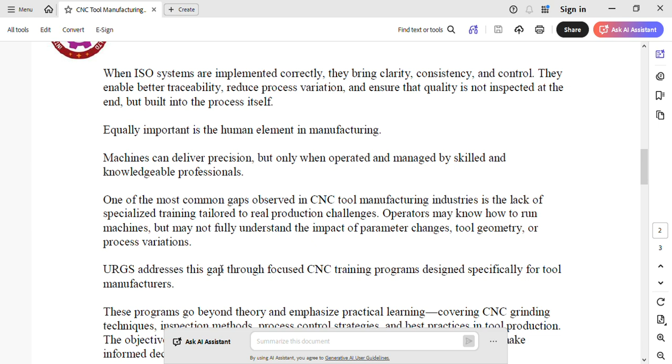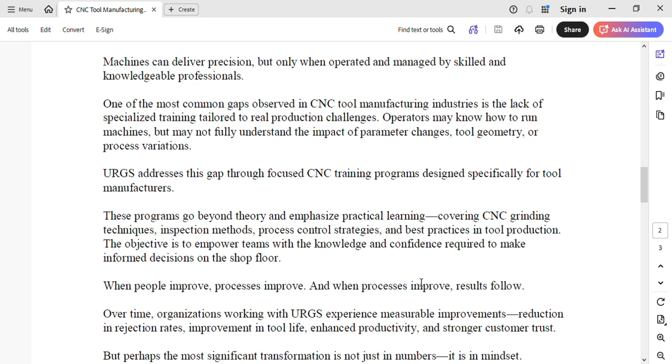URGS addresses this gap through focused CNC training programs designed specifically for tool manufacturers. These programs go beyond theory and emphasize practical learning, covering CNC grinding techniques, inspection methods, process control strategies, and best practices in tool production. The objective is to empower teams with the knowledge and confidence required to make informed decisions on the shop floor.

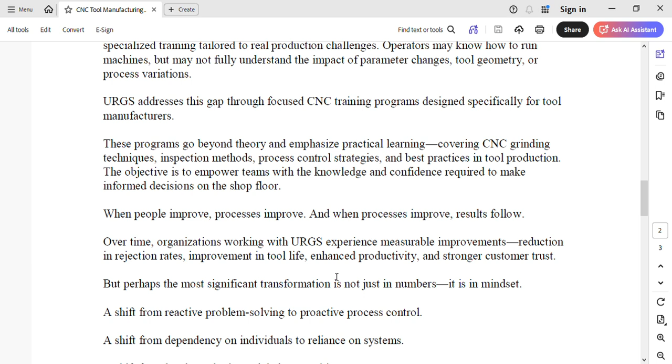When people improve, process improves. When process improves, results follow. Over time, organizations working with URGS International experience measurable improvements: reduction in rejection rates, improvements in tool life, enhanced productivity, and stronger customer trust. But perhaps the most significant transformation is not just in numbers, it is in mindset.

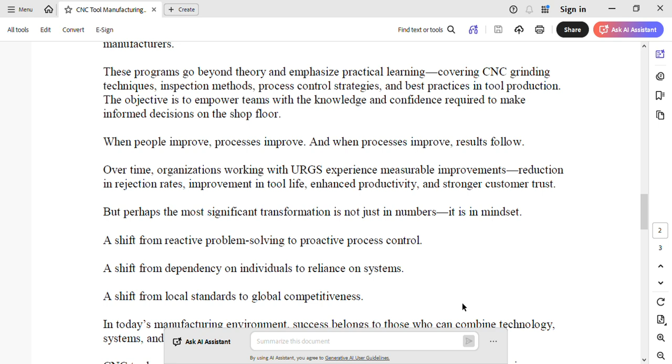A shift from reactive problem solving to proactive process control. A shift from dependency on individuals to reliance on systems. A shift from local standards to global competitiveness.

In today's manufacturing environment, success belongs to those who can combine technology, systems, and skilled people into a cohesive and efficient operation. CNC tool manufacturing is a precision driven industry, and achieving excellence requires more than investment. It requires direction, expertise, and structured execution.

URGS International Engineering Services Private Limited stands as a partner in this journey, helping organizations not only solve problems but build capabilities for the future.